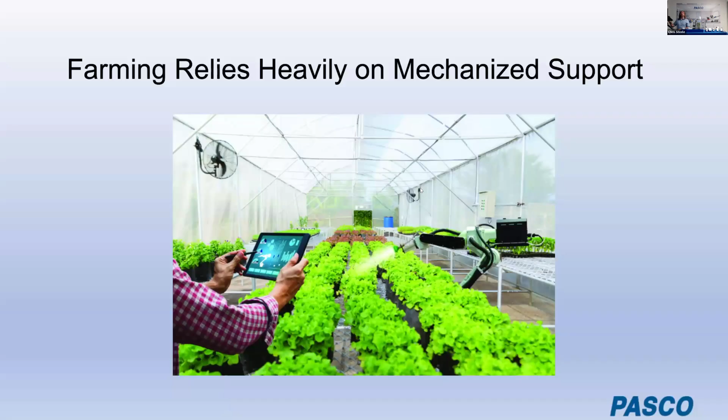There you go, how are you looking? All right, so we'll get started with our presentation. There it is. Okay, Chris Steele, Pasco. This is our farm research and automation. So our concept is that farming relies heavily on mechanized support. It's going to be data analytics, robotics, and sensors that kind of drive the way we understand farming and the way we can integrate with farming and innovate it as well.

So we designed ways to measure live processes. This is going to be with our real-time data. Our sensors can be used wirelessly, Bluetooth, either in a classroom using your computer, or it can be used in the field, and it'll actually keep the data in the sensor until you bring it to your computer, or you can actually use your cell phone to do it mobily as well.

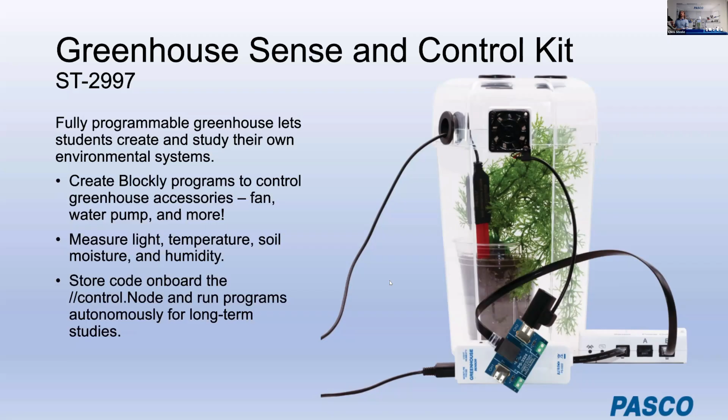Fully programmable greenhouses let students create and study their own environmental systems using Blockly programs controlling fans, water pumps, and sensors that can measure light, temperature, soil moisture, and humidity. This all runs on our control node and can do basically whatever your imagination can come up with.

That's all we have for the presentation in terms of the PowerPoint. I'd also like to go over an experiment if we have time, so we're going to go over the actual photosynthesis lab here in quick detail. I'm going to introduce you to our friend Brandon.

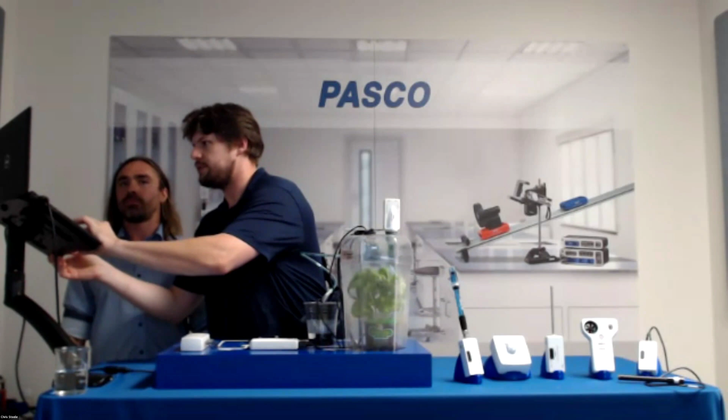Let me share my screen so you can see SPARKvue. There it is - can you see everything there? You should see 4-digit displays, each with a different data parameter: CO2 concentration, brightness, humidity, and temperature. Let me get that out of my way.

Great, they're all there. Our entire greenhouse system is run off of the Pasco control node, which is the brain that controls everything. We do this with our Blockly coding by opening up the Blockly code tab over here.

I need to hide this thumbnail, it's in my way. Anyway, I'm just going to create a simple program to turn everything on. We have a fan, a light, and a water pump. The first thing we want to do is just turn the light on.

So we go into our hardware blocks here. I'm going to set the grow light to a specified brightness that we choose. It mixes red and blue light to cover the full spectrum that simulates sunlight, thus inducing photosynthesis in our plants. Next, we want this to just keep running forever.

As you're going through this, the students are thinking about the process that goes into designing plant care or crop care programs. So I'm going to make this permanently true by saying loop while it's true - it's always true, so it's going to create an infinite loop.

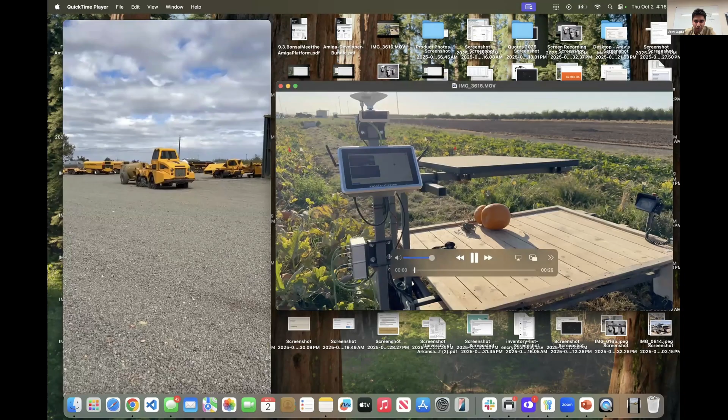So you can see here sort of two of our form factors running autonomously. Today I'm out here. You have the larger drones or the larger robots, as well as the tractors here on the left side. You can see this is a spray tank that we run in the Central Valley. And then this is one of our Amiga platforms that's running in a pumpkin environment to be used as a harvest table.

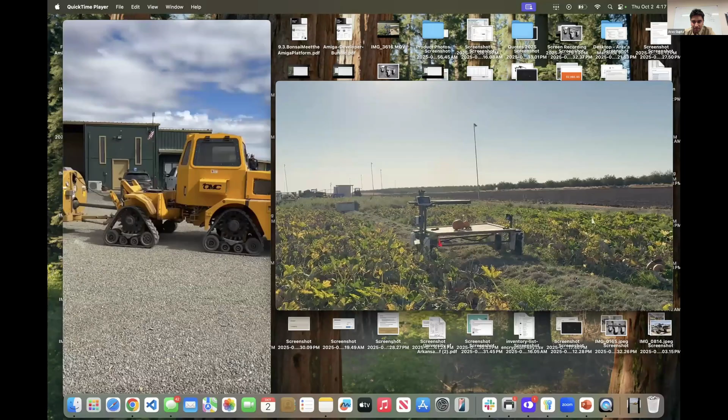So we also have quite a big breadth in the high school and academic space. We teamed up with UCANR for the last 3 years to host something called the Farm Robotics Challenge. The basis of that challenge is students from across the world take this Amiga platform and build custom software or hardware or a combination of both to solve a real-world application.

So we're excited to now spin that off more onto the high school space, to have students take this same robot that universities and researchers and people in the industry are using, and receive it fully unassembled. Students receive it in a bunch of parts. They go ahead and build the hardware first. They then go and wire the whole robot together electrically, and then lastly test the robot with some Python code.

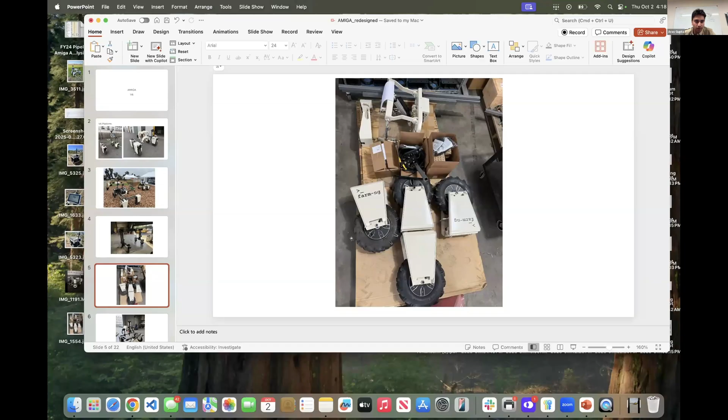A little bit of background about the Amiga platform. It's a fully electric, modular, intelligent robot. It's modular in the sense that you can change the track width from 40 to 84 inches. So you can see here, these are more configured to around the 40 inches, but we can go to something all the way up to 84 inches, which, as you can see here, is used with our fertilizer spreader.

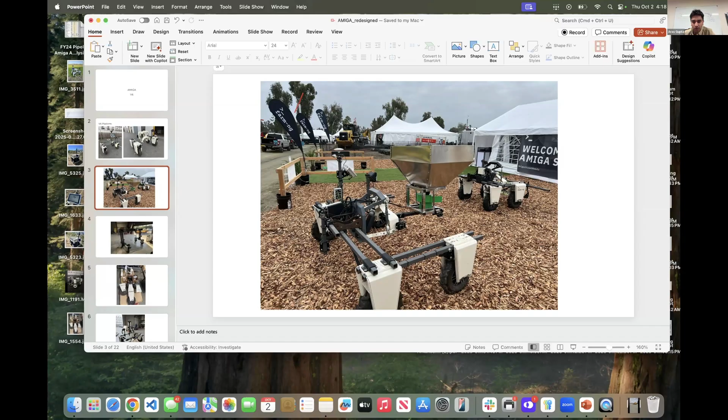You can also change the wheelbase. So you can see here, this robot has a little bit of a wider wheelbase, and you are able to change the height of the robot as well. So everything's on a clamp-based system, allowing you to change the X, Y, and Z axis depending on the application at hand.

And so this is nice, because if you're not looking for your students to really work on the autonomy side, they're able to really work more on the mechanical side to configure the Amiga, configure the robot to solve that real world application that a local farmer or maybe the farm on campus is having.

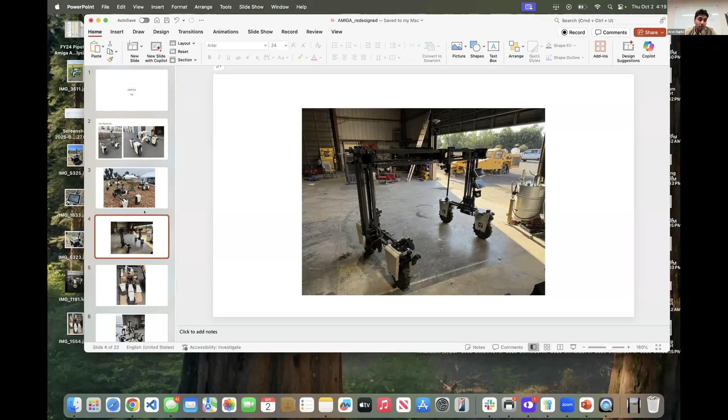The platform, like I just showed earlier, is intelligent. We merge it with something called our intelligence kit, which you can kind of see here in this picture. This is a little bit of a better picture, but this intelligent kit is actually a compute module with a couple of very powerful cameras and a GPS antenna to be able to allow the robot to move autonomously.

And so we have an open source environment which allows these students to take their own Python programming code and deploy it to the robot to do simple movement commands, or to have it run an autonomous path, or to do some detection. This is really nice because students get to start from the ground up to build the whole robot. They understand about the hardware pieces, about the electrical pieces, and then they touch up on a little bit of the software.

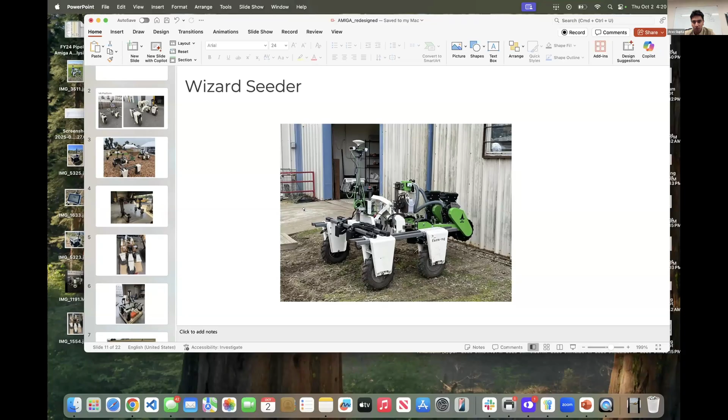This is our research package, which students would be able to build and then start running autonomous paths with to maybe do some transporting, hauling, or data collection. And then you have our system with the 3-point lift kit, which is more for students and teachers looking to actually run implements and tools, and do consistent applications - maybe that's weeding, maybe that's cultivation, maybe that's mowing, but with their Amiga.

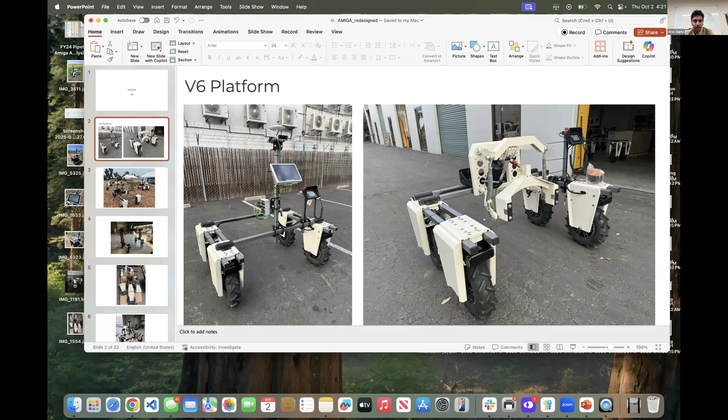And so I'll be sharing our website here. We actually already have several high schools who are involved in this program. One of them is Santa Cruz County Office of Education. This is our second year running the high school curriculum with them. They do a robotics after school program, but this year they're actually going to be doing it during the school year, more in the spring semester.

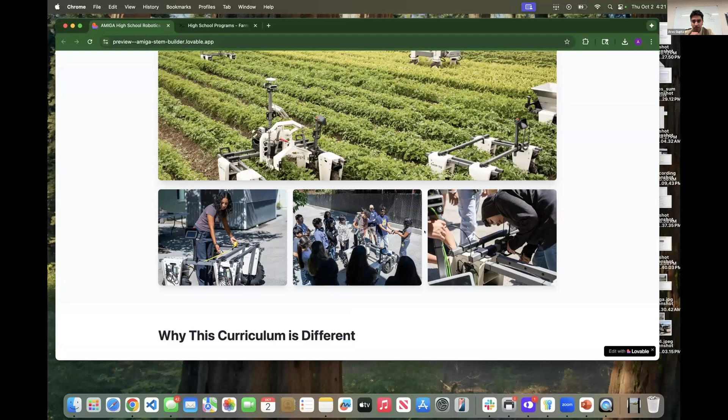And I think the biggest, pretty cool thing about this is that I'll be sharing a map here, which shows all the universities that are currently using the Amiga for either research or the Farm Robotics Challenge. So for a lot of these students, when they're applying for college or looking for jobs, they're able to leverage that experience they've had with the Amiga.

And so we've already been seeing that firsthand with schools, specifically with Greenfield High School out here in the Salinas Valley, where several of their students were able to leverage it and get into some of the schools that they wanted, as well as internship programs that are very hard to get into.

And we also are supporters in the Farm Robotics Challenge, and we have an Amiga Innovation Award that pertains to projects that would be using the Amiga specifically in the challenge. So for the Academy, we're offering a $1,000 specific reward just for that audience. But we also have a D1 and D2 division, where we have the upper education students as well as students more in the community college space.

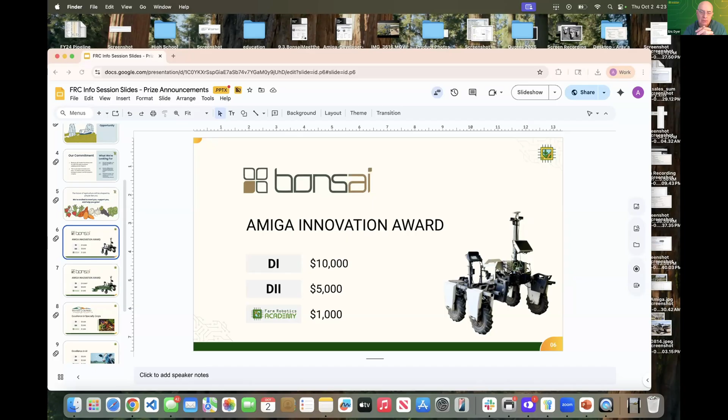And then I've prepared a presentation here. So a little bit about us: we've been in business since 1964 and cover all manner of technical training equipment, curriculum, and certifications.

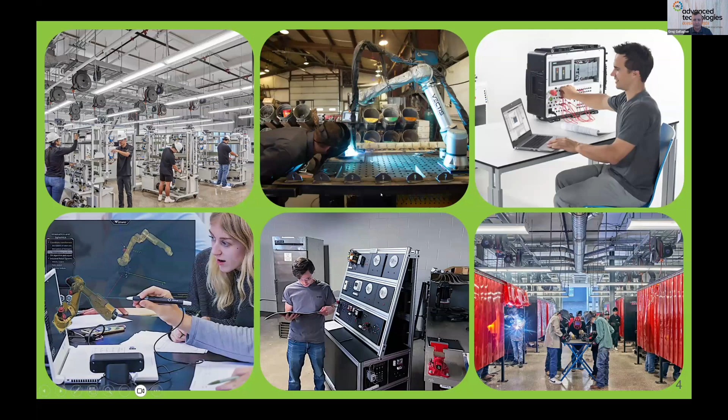That's a collaborative robot that we're working with. There's some mechanical drives trainers. A lot of this stuff applies directly to agriculture and agricultural technology. I don't know how many of you have been to Hartnell College in Salinas, but Richard Chapman started an agricultural mechatronics program in partnership with us and Festo Didactic, our largest manufacturing partner. We're in over 2,200 schools at this point. And again, robot welders, HVAC, welding - we really run the gamut.

Speaking of certifications, we have partnered with NC3, which is the National Coalition of Certification Centers. They've been around for a little over a decade now, 15 years, and in October they're going to hand out their millionth certificate. Just Festo certificates, we've handed out close to 25,000 - this data is a little bit old. So these are industry recognized certificates that partner with manufacturers: Festo for manufacturing and agricultural technology, Kubota for diesel, Lincoln for welding, so on and so forth.

So at Hartnell, Richard is starting his agricultural mechatronics program with this AC/DC trainer that has about 50 hours of curriculum that comes with it. Obviously electricity is foundational and fundamental to any sort of robotics, any sort of technological pursuit. In addition to NC3 certifications, this and our Mech Lab, which I'll get to next, are the two components used in Skills USA's mechatronics competition.

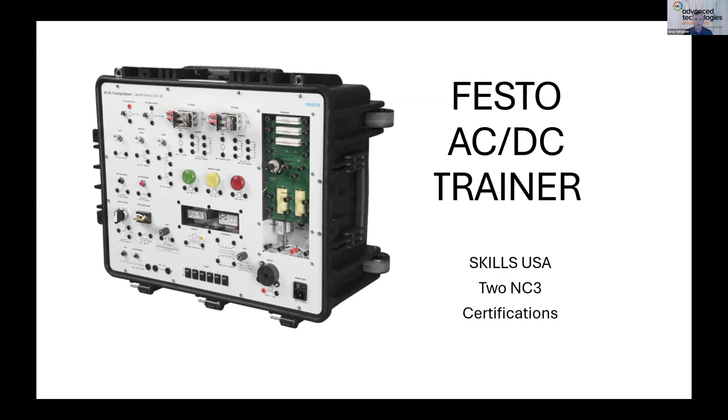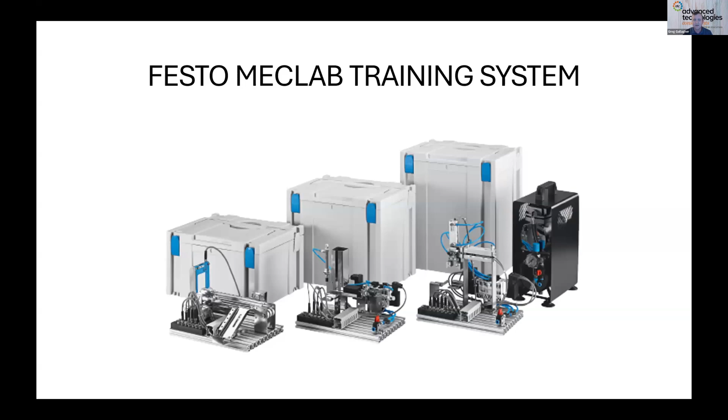We were at Taylor Farm's gigantic facility in Salinas the other evening for a tour, and all of the components you see here, the pneumatic valves, the tubing, solenoids, this is all stuff you see in big facilities like Taylor Farms. Festo is the global leader in automation and pneumatics hardware.

So there's a very gentle learning curve when you learn on the equipment you're going to see out in industry. This is the first of three stations, touching on all of the objectives you see there.

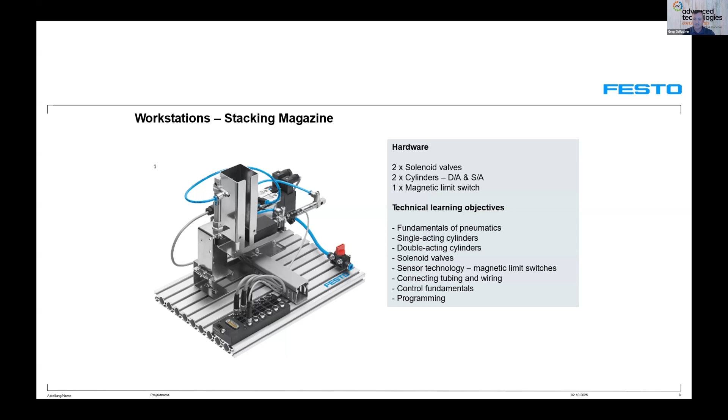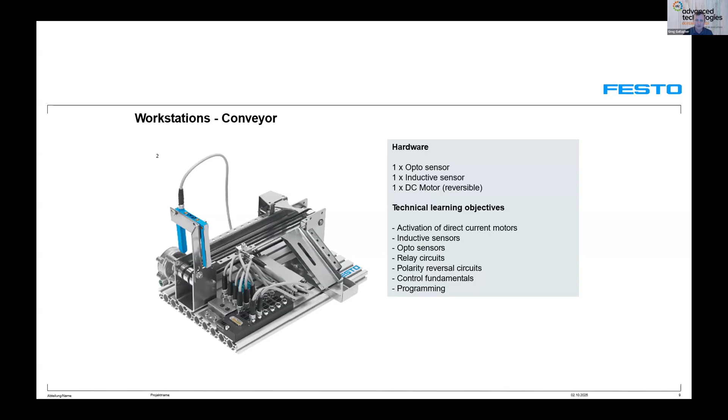Here's the second. It's got an opto sensor, an inductive sensor. We talk about separating metal out of, say, green leafy vegetables, which is exactly what we saw at Taylor Farms, using sensors to make sure food is safe and clean. And then this third handling station, getting into grippers, solenoid valves, sensor technology, programming, logic.

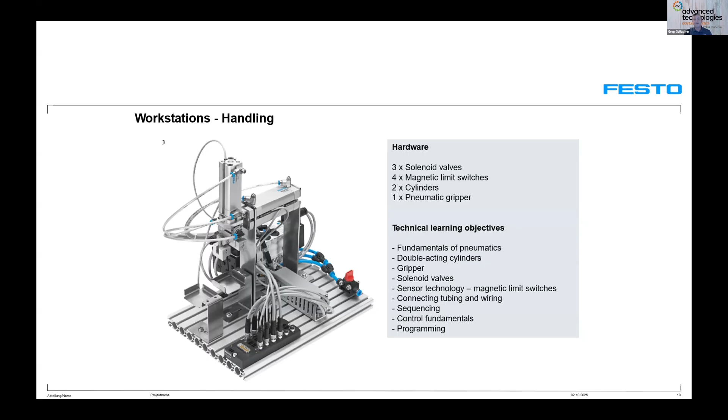And then they have just recently added a collaborative robot station to work alongside the MecLab. It's got a Dobot Magician on there. Again, comes with hours and hours of curriculum, and also available on an online LMS, so it's very easy to access.

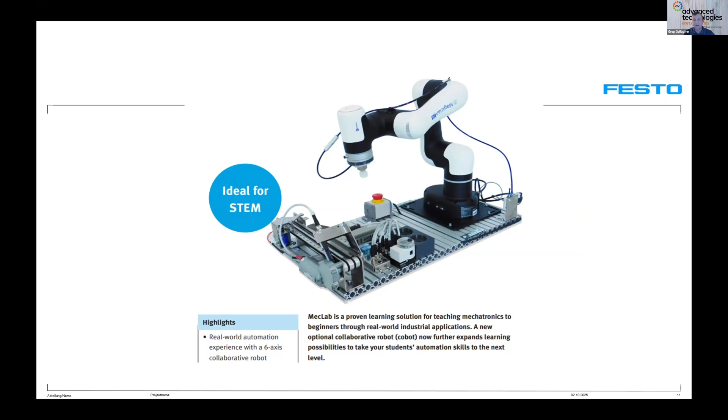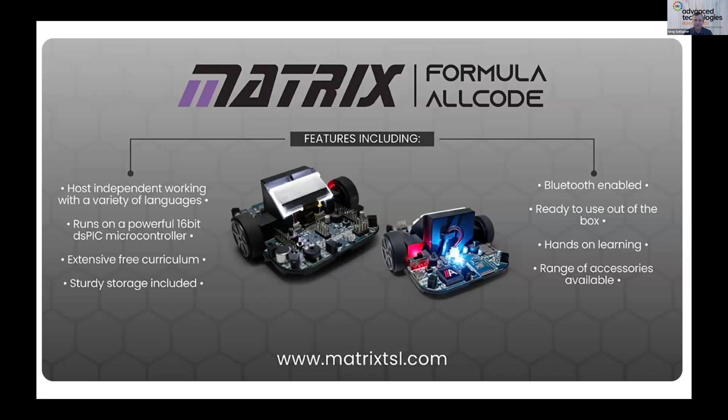And then stepping away from Festo, we also partner with a company called Matrix. This is their Formula Allcode, little race cars that students can code with a variety of different programming languages. So if you're more familiar with Raspberry Pi, Android devices, or Linux, it's agnostic when it comes to that sort of stuff. So whatever coding language you choose, you can use with these.

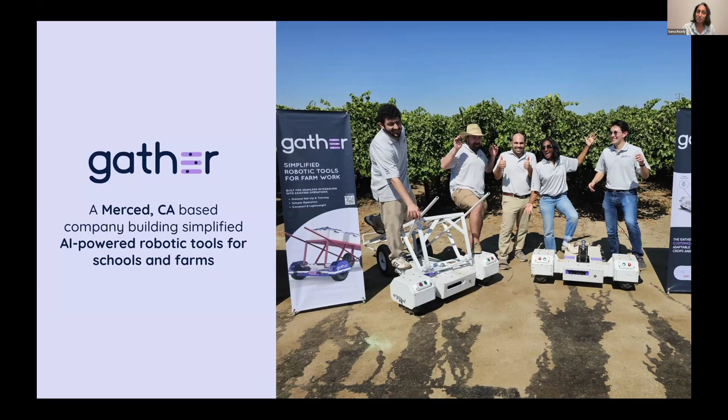So first, who are we? We're a Merced, California-based company on a mission to build simplified AI-powered robotics tools for schools and farms. The Gather platform autonomously transports different types of crops and materials in field and around the school and farm. Our goal is to empower students to build, develop, and innovate in ag and STEM.

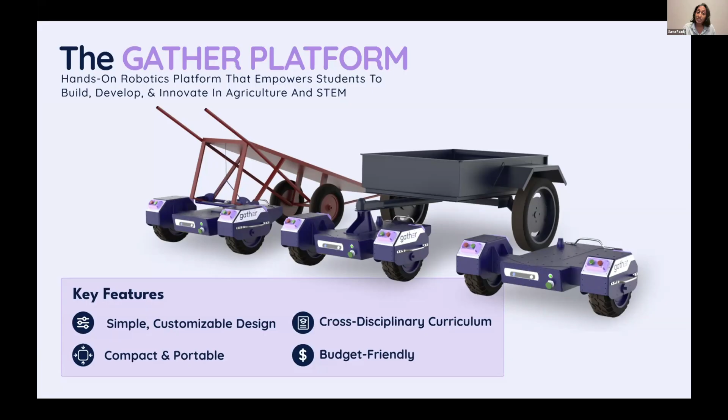4 key features: 1, a simple customizable design; 2, compact and portable compared to other kinds of transport type systems; 3, cross-disciplinary curriculum; and 4, budget friendly.

So we are built specifically for high schools. Our mission is really around making ag robotics simple, affordable, and accessible, not only for the teachers and administrators, but also for the students.

So you can come in 3 different ways with us. One, whether you're computer science, ag mechanics, you probably have a different type of background as a teacher. So this curriculum for teachers provides the platform, the kit, and a teach-the-teachers virtual session to walk through the educational modules. And you can even come in and build the Gather rover with us if you're kinetic and want a hands-on experience.

Secondarily, of course, is the challenge. If you already have teams selected, take the platform, the kits, and just use the modules as a guide. And third, we're building a community of educators. Like I said, I'm one myself. We really want this feedback to build a really good program.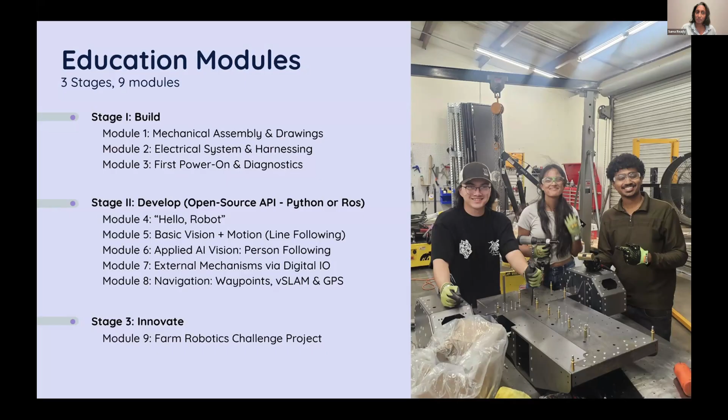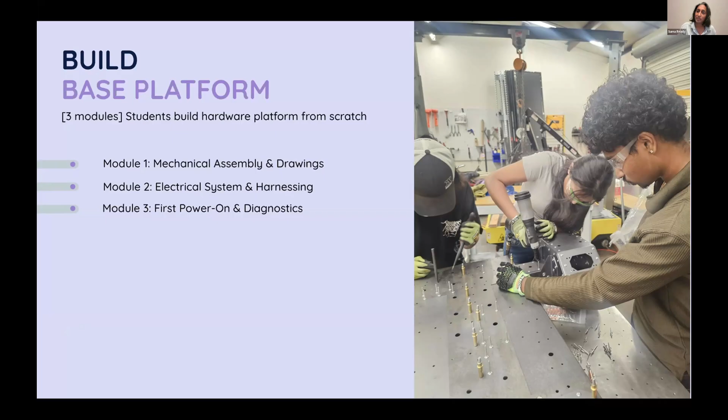So on the curriculum: about 9 different modules focused on, one, building the system, and second, the development and software autonomy component. Building the system means building the hardware platform from scratch. You see 3 students here working on this: the mechanical, the electrical, and then power-on and diagnostics. On the mechanical side, everything from interpreting BOMs to using rivet tools, QCs, and different kinds of activities to make this really fun and engaging.

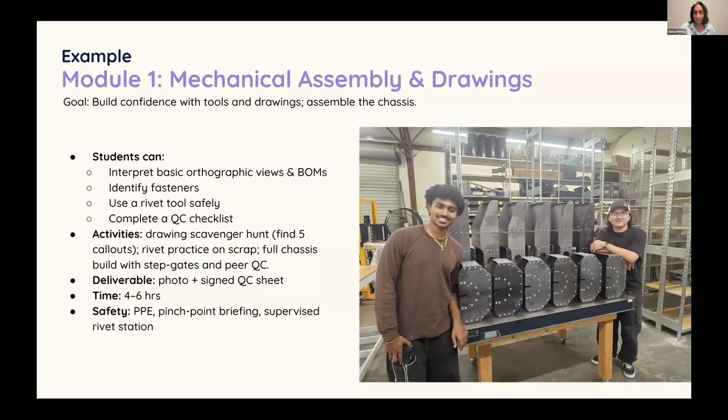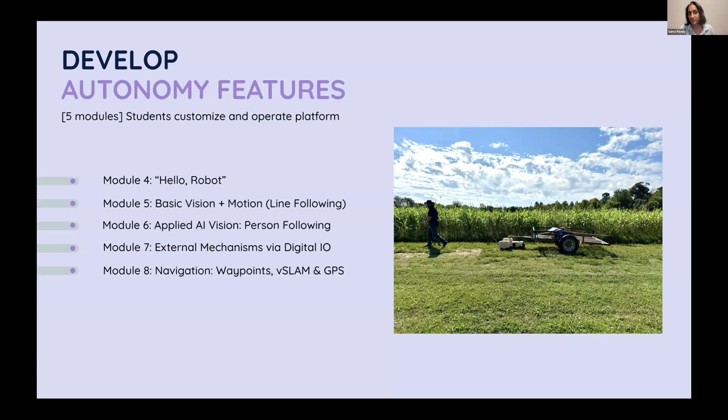On the autonomy side, we find this can be really intimidating for some teachers, so we've broken this down to be as simple as possible, unless your students are already pretty advanced in computer science. Here's a module on vision and motion. There are a lot of words here that maybe some of you know, some of you don't, but don't get intimidated by it. We're here to walk you through it.

The second place where you can slot in, of course, is the challenge itself. So what would a student do? Here's a snapshot of the system. A lot of words here, but basically, what can they customize? Number one is on the mechanical side, using things like wheelbarrows, trailers, and mower sprayers to move things on the field, and they can customize that.

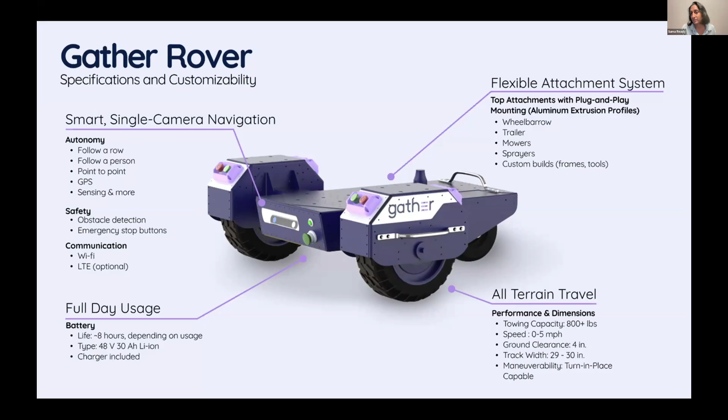The second is the autonomy. Autonomy is really around getting the robot to move. Do you want to follow a row? Do you want to follow a person? Do you want to do point to point, etc.? There's some information here on battery and towing capacity, 800 pounds, etc. Those are the specs that would stay static for the student.

So on this challenge, like Amiga, we'll offer the $1,000 Innovation Award. We are going to speak with the organizers to see if we can break this up into smaller awards, for example, 4 awards at $250 each, depending on the rules and regulations of the challenge, to spread the wealth and spread the feeling of joy.

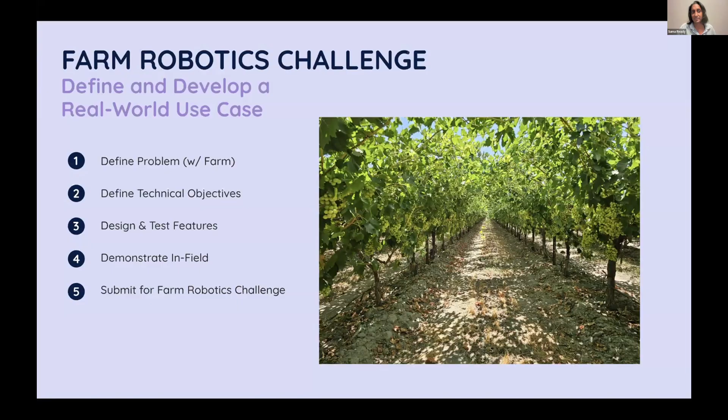In terms of the challenge, you guys know all of this around defining the problem, objectives, and testing features, but we want to give you two real case studies. Here, Ray might want to transport crops efficiently, so he's looking for a solution. First question: what kind of attachment? He says trailer. Great. Objective: haul up to 225 pounds. So the student must meet that objective.

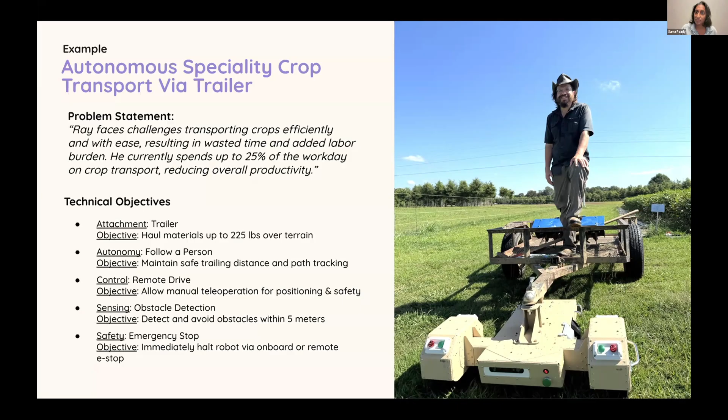For autonomy, they want to follow a person, so maintain that safe trailing distance. Ray also might say, I want a remote control, so you enable that. And then of course, there are some safety features that are always built in to whatever you're going to do. Here's an example of what that could look like, where you see this Gather rover, that small little system dragging a huge trailer around the farm.

Second quick example is for vineyards. As you might know, 99% of table grapes are grown in California, which is pretty amazing. Wheelbarrows are used primarily to haul crops, so it's very time consuming and labor intensive. So the attachment here is not a trailer, but a wheelbarrow. How do you actually build that into the system?

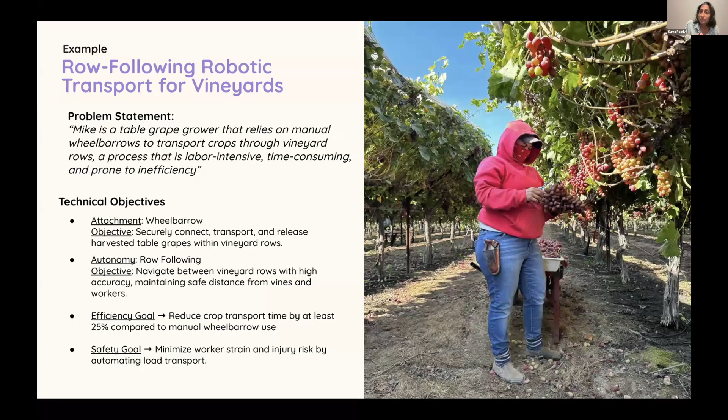The autonomy here is row following, so following the vines, being able to sense them and go down a row. And you might throw in some efficiency goals and safety goals, that's up to you as educators and as well as for students. So what that could look like here: bumping, going down the row, dragging some grapes right there.

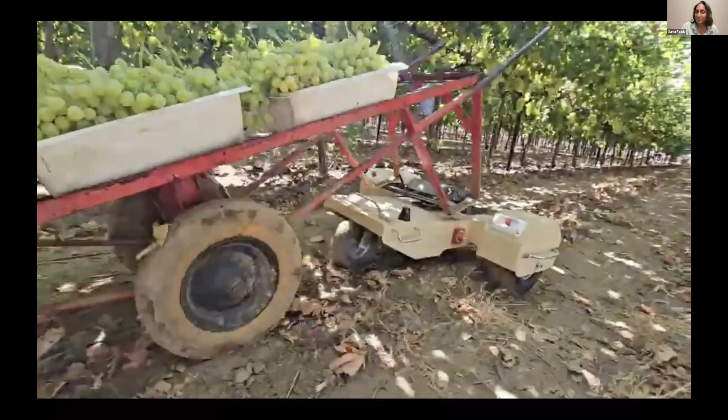We also wanted to say, as a non-ag challenge, there's a lot of ways you can play with this beyond the competition. We were speaking to some folks here who talked about a use for a maintenance worker at a school - they might want to put a utility cart or a bin hauler on the system, have it follow them around, do campus route navigation, maybe from a maintenance shed to a gym to a cafeteria, and then have safety elements as well.

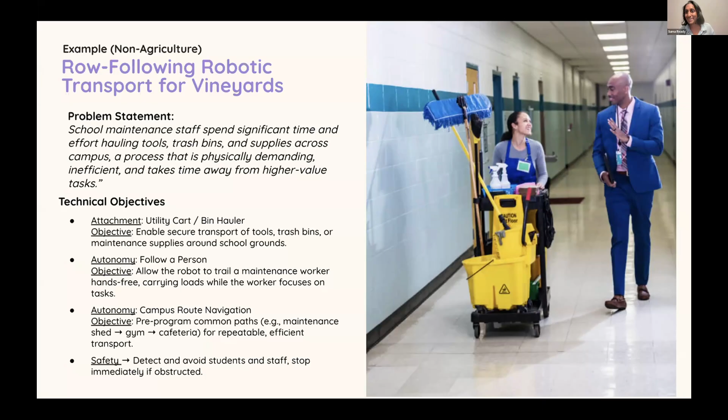No one has built this yet, so it's kind of an invitation to you if you engage.

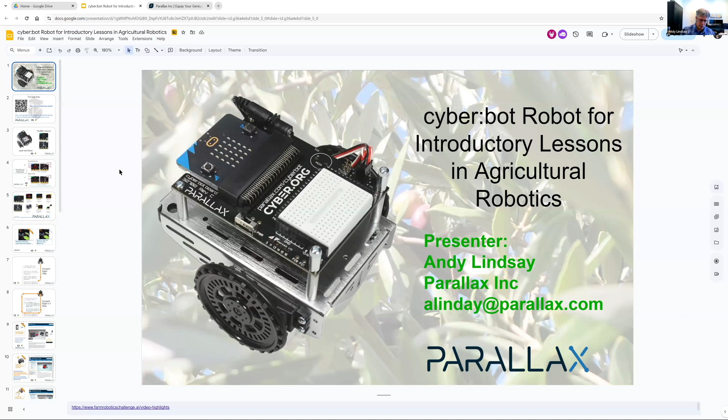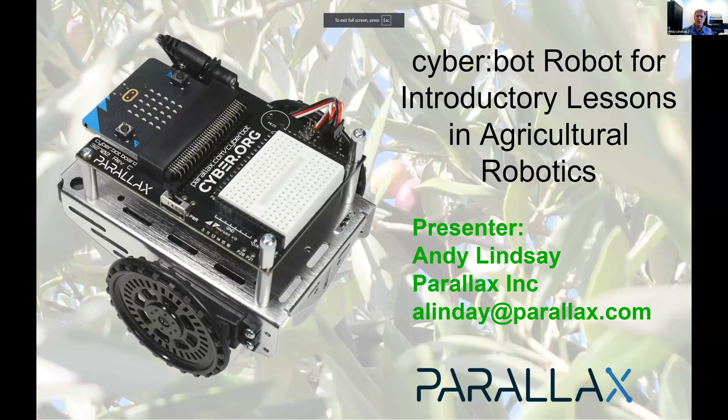So what I'd like to talk with you about today is the Parallax cyber:bot robot. This is a small robot that can be equipped in a classroom with a 1 to 2 student per robot ratio, and that is favorable for some introductory lessons before moving on to a larger robot.

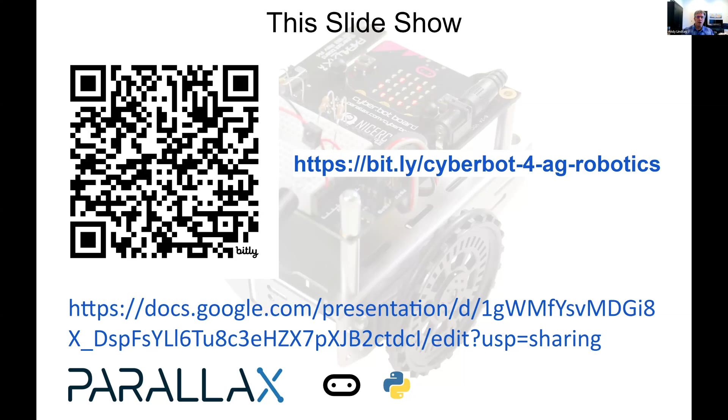If you want to take a screen capture of it, here is a link, 3 ways to get to this slideshow. Again, I'd like you to save this slideshow because it has so many useful links in it. All of our curriculum, or at least our student-facing curriculum, and much of our teacher-facing only assessment materials are kept for teachers only, and then everything else is published on the web.

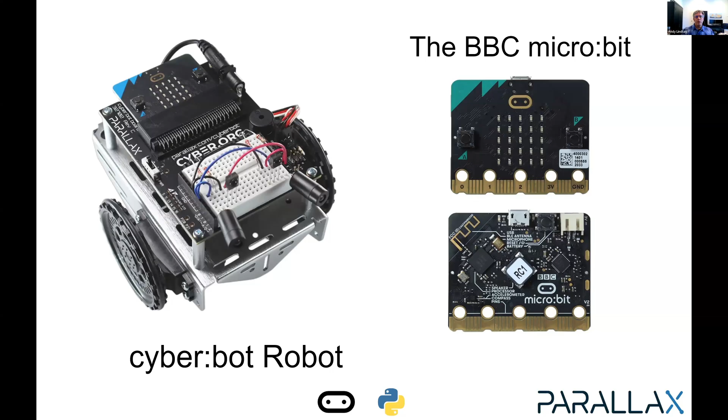Anyway, here is the Cyberbot. It has a microbit brain. This is a processor that has built-in display, push buttons, an edge here where you can connect circuits, as well as a built-in accelerometer, compass, and radio for networking. So just on its own, the microbit is great.

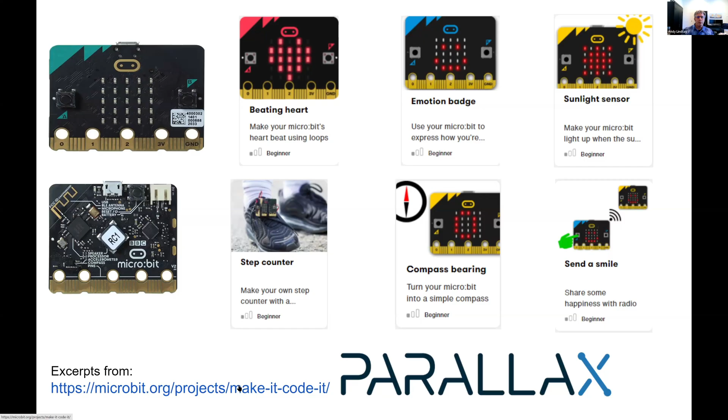These are links to a whole bunch of fun little activities with the microbit only, as warm-ups, at microbit.org/projects/make-it-code-it.

Also, I have links here to some Parallax lessons in both MakeCode, that's a block programming language, and Python, with sensors instead of a pre-calibrated scientific sensor. These are sensors that students get to wire themselves and then work on potentially calibrating, as opposed to, well, it's more about learning how to read the sensor at an electronics level, as opposed to a prepackaged sensor.

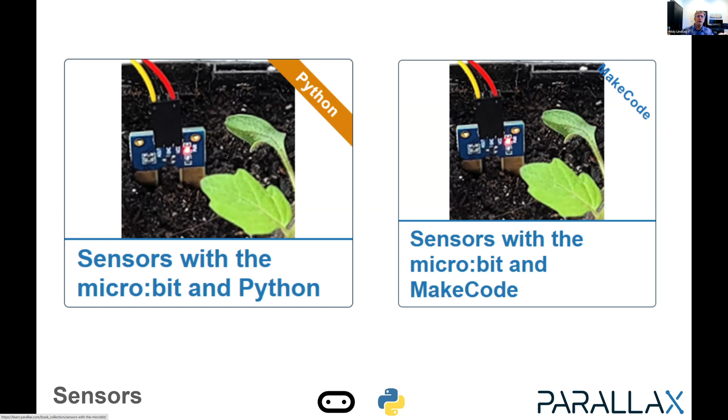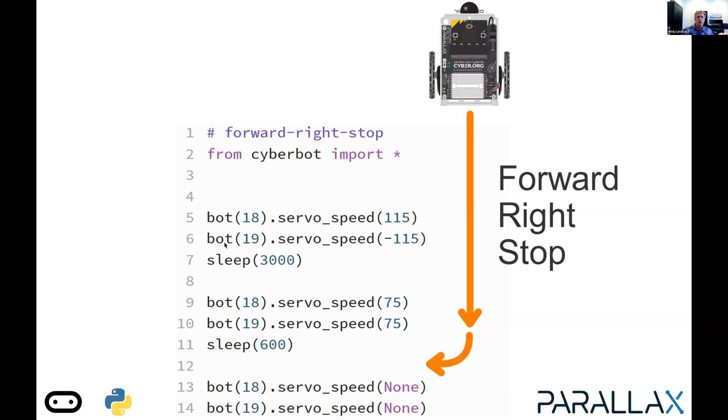The robot itself is great for introducing fundamentals. Here is a Python script that has statements in this area to make the robot move forward and turn right. You can indent those statements and then add one more statement above it to add an important feature of programming, which is repeating something a certain amount of times.

Students learn lessons, first on the screen, and then through the robot, so that they can apprehend a valuable language such as Python, which is used, as you've heard, in some of the other robots during the other vendor presentations.

With the Cyberbot robot comes a number of sensors. With the small time limit, I'm going to skip playing these videos, but this is an example of a lesson where a contact sensor is built on the robot's prototyping area, and then it navigates and bumps into things and turns and finds new directions.

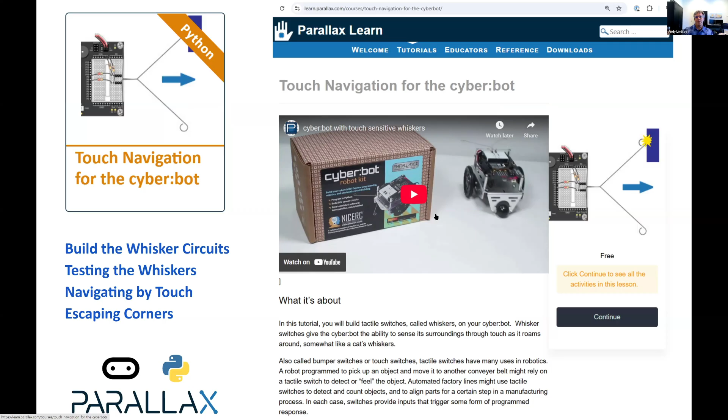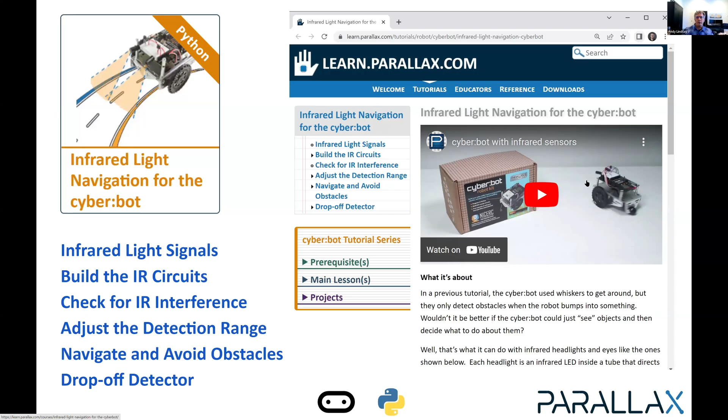We also have, in the stock kit, light sensors that students can build and program the robot to follow or avoid light, find a garage to park in, that kind of stuff. Also non-contact infrared flashlight sensors, where the infrared is shined out, and if it comes back and reaches the sensor, the script can know to turn away or toward an object that it detects.

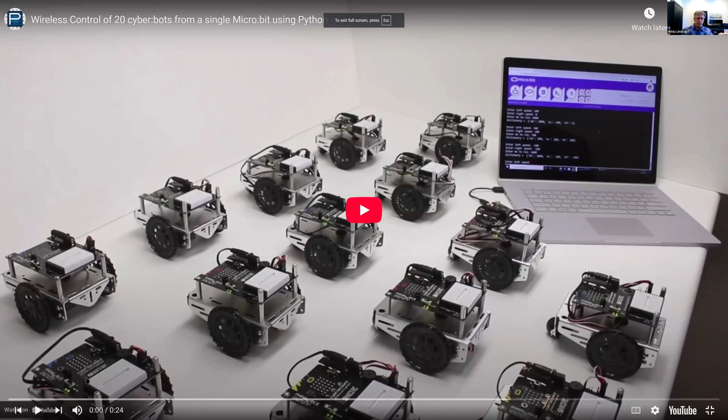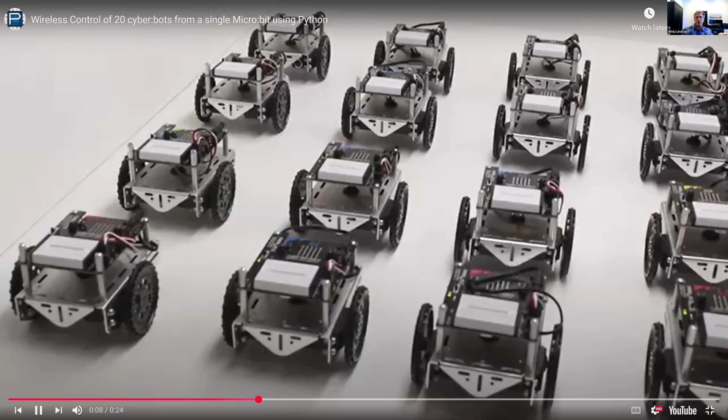This is a fun one. I'll go ahead and show it to you. It has to do with the built-in radios in the microbit. It makes it possible for networked applications. Like here in this example, there's one microbit connected to the teacher computer, and all the student robots are essentially receiving the same command over their radios. So that's pretty neat.

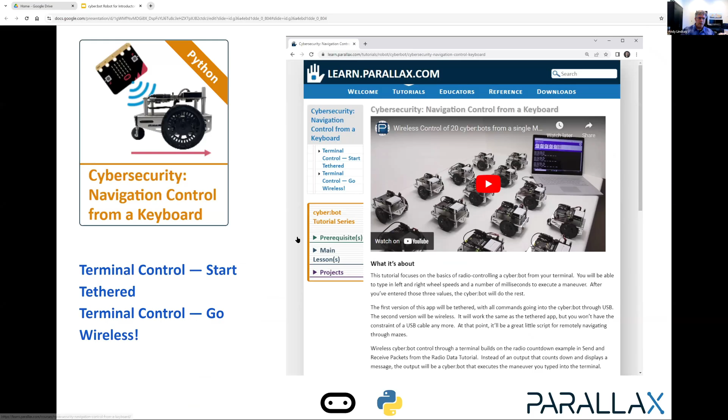There we are. Terminal control with another radio connected micro:bit.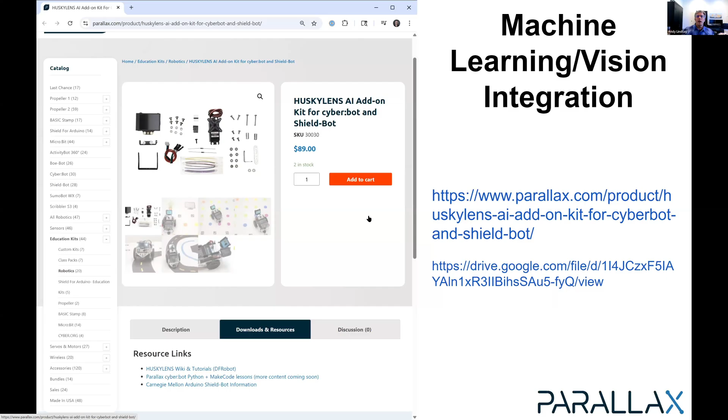And then we also have a machine learning and vision integration package, which you might find to be attractive as a primer for some of the larger robots.

So basically attaching this, it's called the HUSKYLENS machine vision module, onto the robot, and then wiring it up so that it can communicate with the robot.

This will allow you to... sorry, let's go back. The vision module can then be configured to recognize certain things.

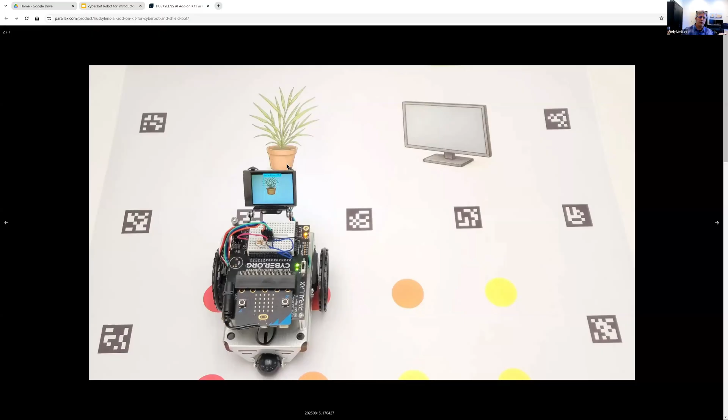Like here, it's recognizing a potted plant. We've got certain colors and other objects that the robot can recognize, and it can also report the coordinates. So this is a good primer for using some of the vision systems on the larger robots.

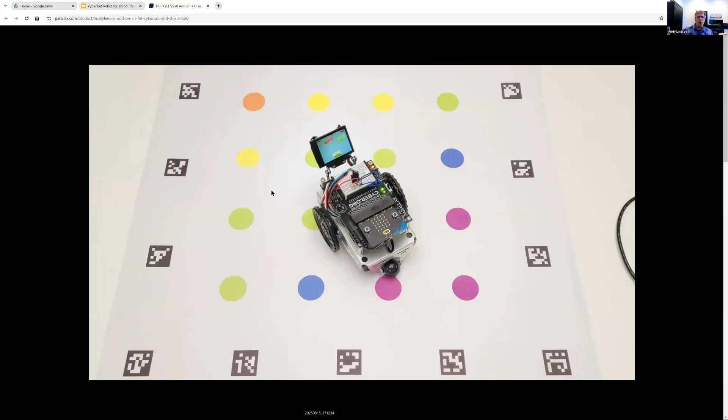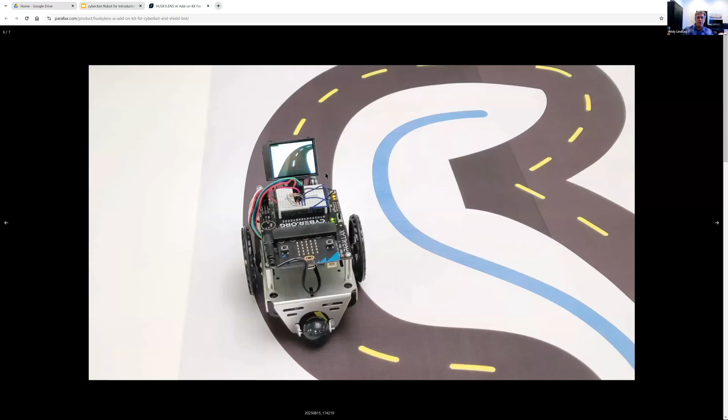And here it's detecting colors in a field of colors. It can also do a road following example using its line detection feature. So these are important getting-ready lessons, and then detecting certain objects.

And there's also an option of a tilt. So we have pan through the robot's ability to rotate in place, and then this little servo here is connected to it so that you can have both pan and tilt with the camera module.

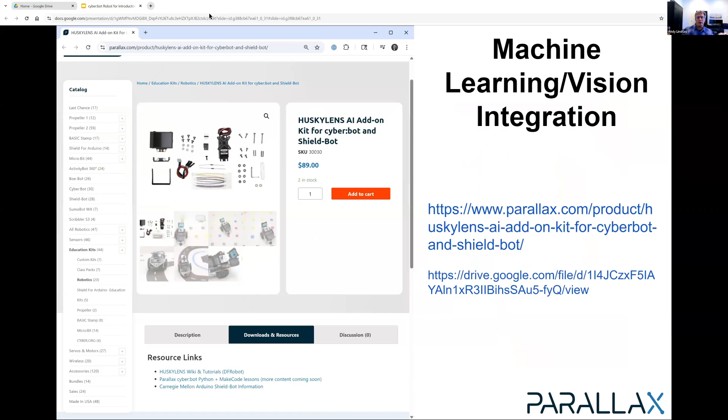The camera can also be mounted just as is, and then the servo can be used as an actuator.

At any rate, so this to me is a starting point before going to - and here's a nod to Amiga's awesome, amazing robot - as a starting point in the classroom with a one-on-one or two-on-one student to robot ratio before going out into the field to work with the larger robots.

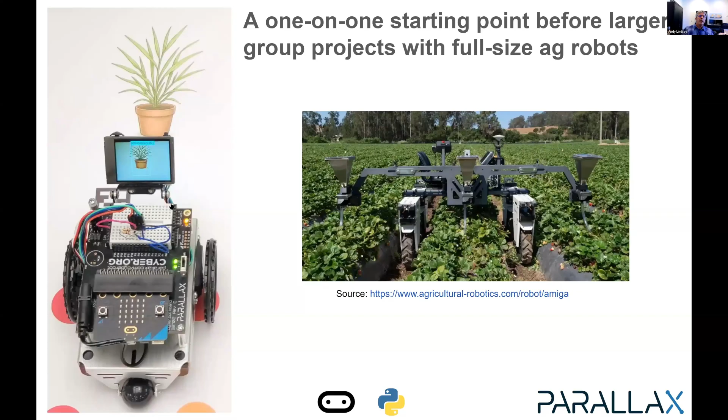Yet we get the valuable lessons in Python, et cetera, again as preparation for the larger robots.

Again, this is all free. It's all on the web. It's all student-facing lessons that you can simply follow the link to, go to the page, and actually open - for example, navigation by light - and go through the entire chapter.

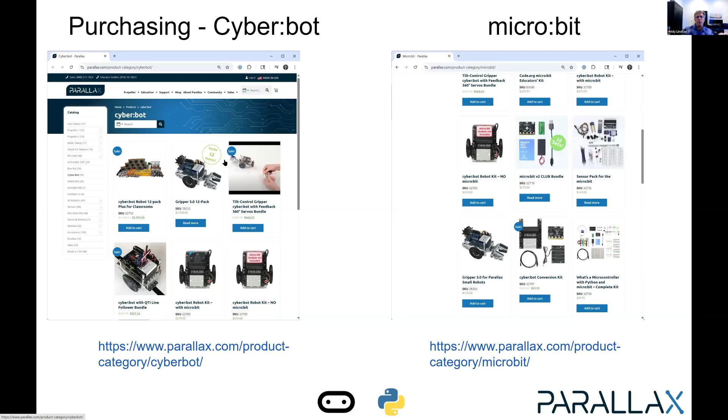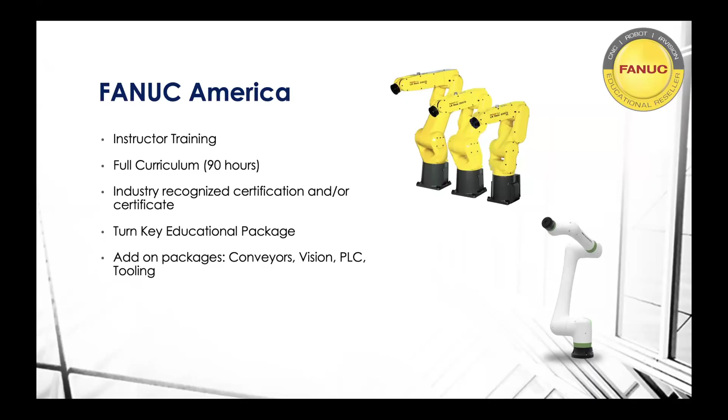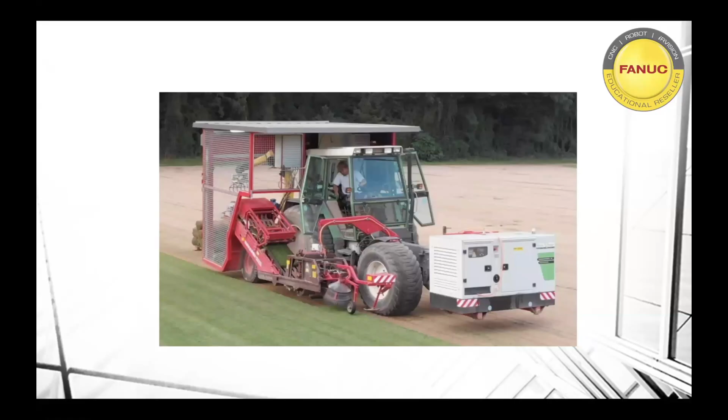The next company share was called MINDS-i Robotics. MINDS-i specializes in agricultural applications of robotics, just in a scaled down version. They've got autonomous mobile robots like autonomous tractors, and autonomous drones. Each product offered with MINDS-i has a full 45-hour curriculum course written around it, covering things like GPS, programming, sensors, and so forth. A couple of the products I thought would be most applicable to the Farm Robotics Challenge are...

Our UAV drones lab, where students are actually going to construct these drones. They're going to go through a curriculum, learn about programming, the remote controls. There's a flight simulator and a gimbal that comes along with it, so they can get comfortable flying these drones indoors prior to taking them outside. They're going to learn about GPS, compass, telemetry, and all that stuff. Again, 45-hour course, each lab designed for about 3 to 5 students, and it's a great introduction to that drone technology.

The next one is our self-driving autonomous tractor. This is basically a scaled down version of what you might see in a real field setting, like you can see in that upper right hand corner of the picture there. We've actually gotten it down to 2-centimeter precision, so it's extremely accurate. It's going to be programmed to be fully autonomous after students go through the 45-hour course. It's got multiple different attachments you can add onto the back of it, like a sprayer or a weeder, all fully functional. For example, with the sprayer, you could fill it up with water or fertilizer and program it to go around your school's small field or parking lot to run a sample route.

And the last one is called Stokes Robotics. A lot of you have probably seen the robotic dog, whether it be on social media or at a conference. So Stokes Robotics takes these robotic dogs, and we write an entire curriculum course around them that introduces students to robotic programming and operations. Similar to what many of you have said today, we can program these robots in Python, C++, Scratch, etc.